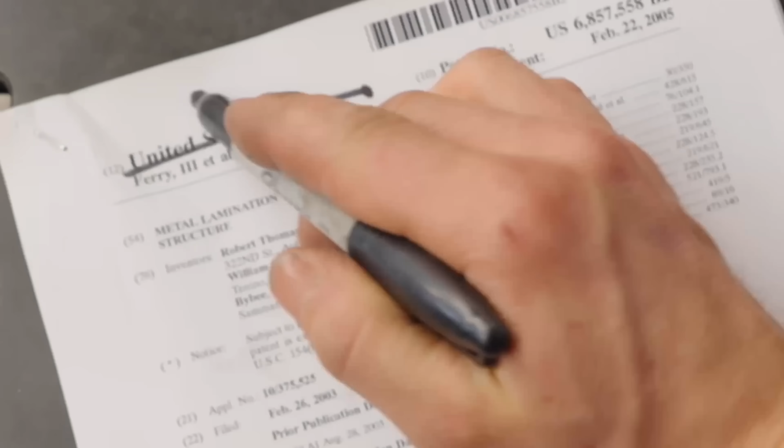2 years ago, upon discovering that the patent for making titanium Damascus had expired, I decided that it was time to figure out how to do it. And we were successful at making beautiful patterns out of titanium that reveal colors that are so unique and only possible with this incredible material. Just look at it. Isn't it wild?

Titanium is the metal of the space age. Its incredible strength to weight ratio means that it is the material of choice when performance is required and cost is no obstacle. From the SR-71 Blackbird to pistons in racing engines, I drop forged that out of titanium, to hip replacements thanks to its low reactivity in the body.

Titanium is an incredibly special metal that is very challenging to work, but it's even more challenging to get it to bond to steel. And so over the course of several months in 2024 and 2025, after doing reams of research, speaking to experts, and with experiments here in the workshop, we successfully diffusion bonded, otherwise known as forge welded, titanium to steel, and I was able to create a direct bonded titanium and steel chef's knife, as well as a nickel interlayer diffusion bonded titanium Damascus to Damascus steel axe.

And the dream throughout all of this experimentation and research was to start what we are starting today, a titanium Damascus katana. The history of the katana as a weapon, a tool, a piece of art dates back to the 4th and 6th century in Japan, and for over 1,000 years the katana was at the forefront of metallurgical innovation across the world. What those blacksmiths discovered and understood about steel making and metallurgy is truly remarkable, and with the greatest respect, I want to produce a piece of art that is a fusion of this historic symbol with modern materials. And in order to pull this off, we're going to need to do reams and reams of experimentation, research, and trial and error, and that is going to begin right now.

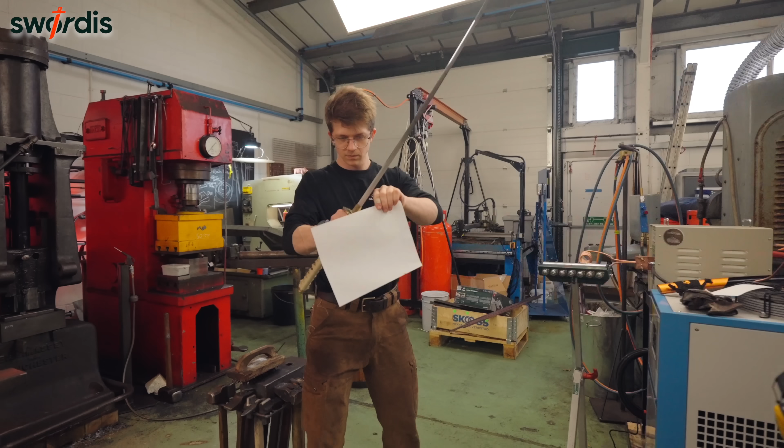And when you look at the profile and shape of that, and you imagine that I need to make this out of titanium Damascus and steel Damascus, it is daunting, because it is long, thin, it needs to be perfectly straight, and it needs to have all of the mechanical and physical properties that we require.

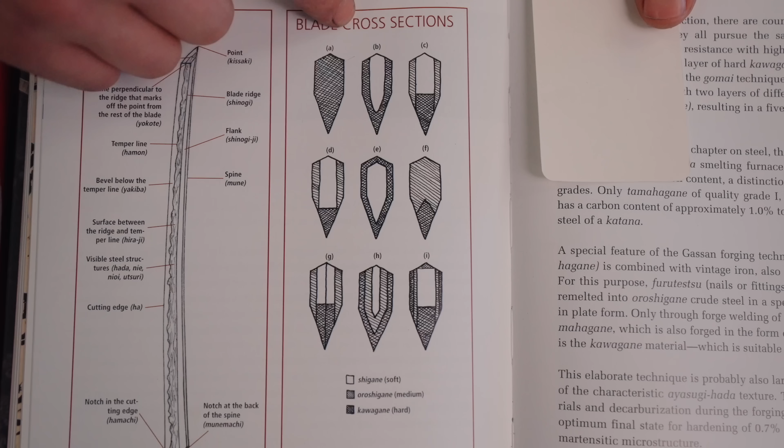Along with thousands of pages of these books that we need to go through to make this project as good as it deserves to be. And so with that, we need to come up with a bonding plan. Now, the laminated construction we're hoping to achieve absolutely has historical context to it, but which of these styles we actually use is going to depend on the results of our following experiments. Rudolf Dick's book on Japanese blacksmithing is fantastic, and I definitely recommend it. We need to go shear some titanium and steel.

Yeah, boy! This is our titanium. Get some steel for a jacket. Oopsie. I mean, this is a 2-man job to set this up.

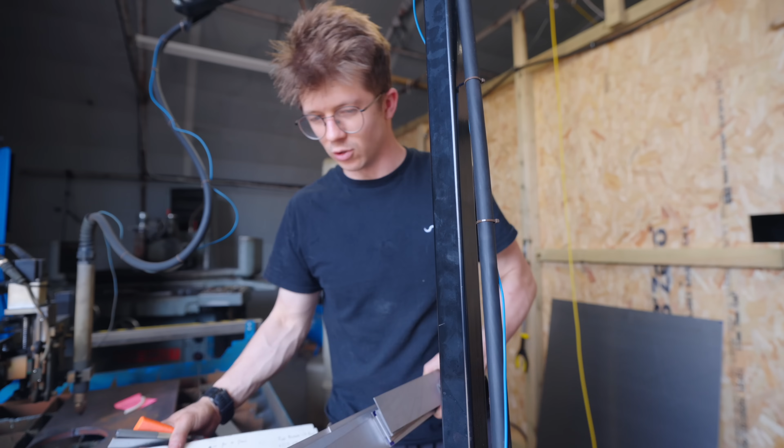All right, so for our first 2 experiments, here's my steel. Here is all of my grade 2 titanium. And here is my jacket material. Now you'll see, for 2 billets, I only have 4 pieces of jacket material because in order to reduce the amount of welding on the jacket by 2, I want to make it into a U shape, and so I made a die and a little top tool to do just that. I've given it all a test, and in theory, it should work just fine.

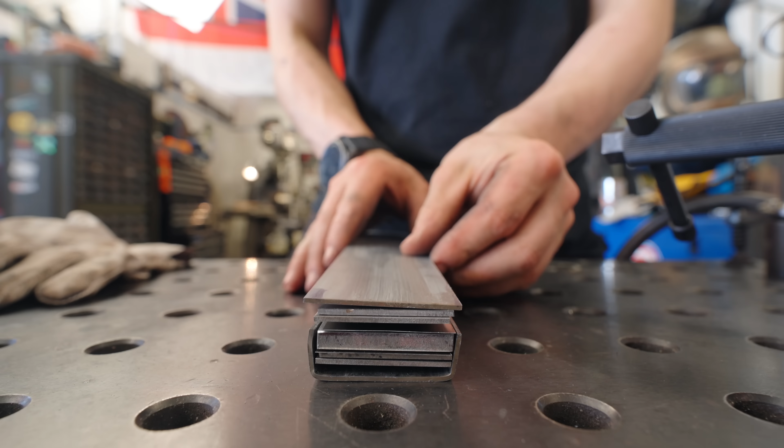That looks a bit crap. Golly, that's quick.

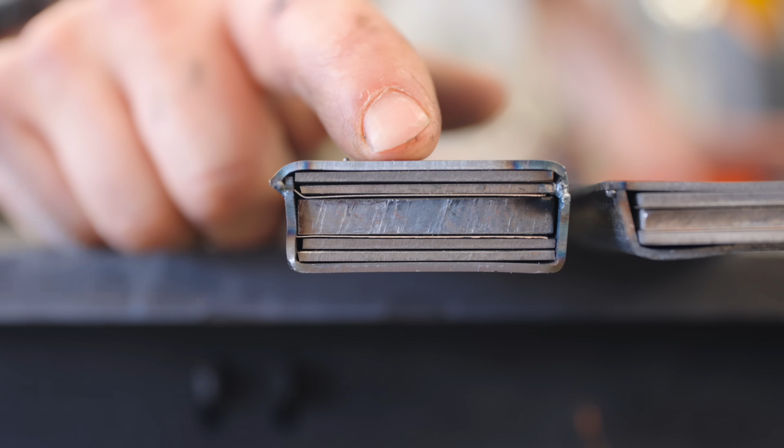There we go, you are now looking down the end of our first 2 experiments. As you will see, we've got on our long and thin billet, titanium, nickel interlayer, steel, nickel interlayer, titanium, and our short and fat has titanium, titanium, nickel interlayer, steel, nickel interlayer, titanium, titanium. Should be obvious now what we are trying to test.

We're trying to test if it's going to be better to bond these materials together in a thinner but longer profile where there is less drawing out and forging to do, or whether it's better for us to bond them together in a short and fat profile.

I've used a thicker steel in our short and fat piece so that when we draw both of these out to about 900 millimeters, 6 millimeters thick, our short and fat piece is half the length and twice thickness, and of course with a thicker bit of steel inside it so that hopefully the core of steel on both of them, when they are drawn out to 900 millimeters, is consistent between one and the other, and we can see if we learn anything. It's going to be very important for me to decide if I'm going to do the bonds for our katana close to final dimension or a long way away with lots of forging to go.

Both of our samples have a 0.2 millimeter thick nickel interlayer to act as a diffusion barrier between the titanium and the steel. We're going to weld a little end cap here with a hole so that the argon can flush through. We're going to weld some pipes on this side so we can hook it up to my argon hose, and hopefully we're going to be learning a thing or two pretty quick.

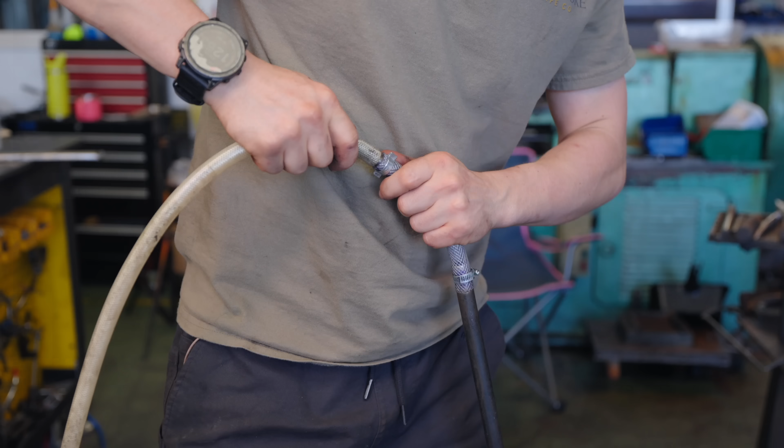There's our argon. Plug that in here. And what we're doing, we are pumping argon through this billet so that we're hopefully going to evacuate all of the oxygen. I can then turn the pressure down and just have a little trickle, so we've got a positive pressure in here. Any oxygen in here at a high temperature is going to be a bad time because titanium oxidizes very strongly at temperature. Oh, hello. We're definitely getting argon flow. We've now turned down the flow.

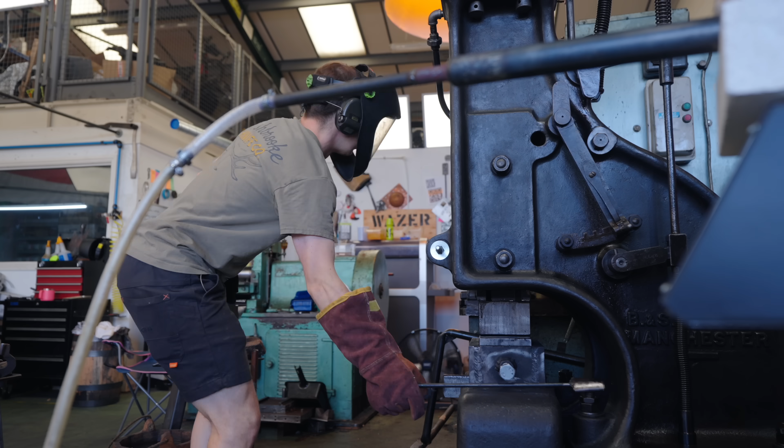Okie dokie, 900 degrees Celsius. 1, 2, 3, 4. Ow! Yeah, baby. Yeah, mama. Let that sit in there for a minute. Then we can pull it out to air cool and start on the next one. Unfortunately, there's no real way to know if oxygen's in it or not. We just hope and pray. In we go. Up to temperature. Here we go.

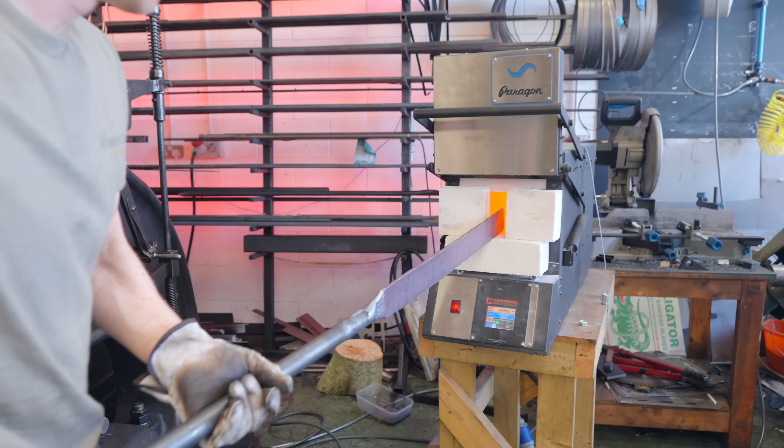Once these have cooled, we're going to peel off the mild steel jacket, which shouldn't be bonded to the titanium. We'll see if we got welds before we then draw it out to final size. Oh yeah. Oh. Woo. One down.

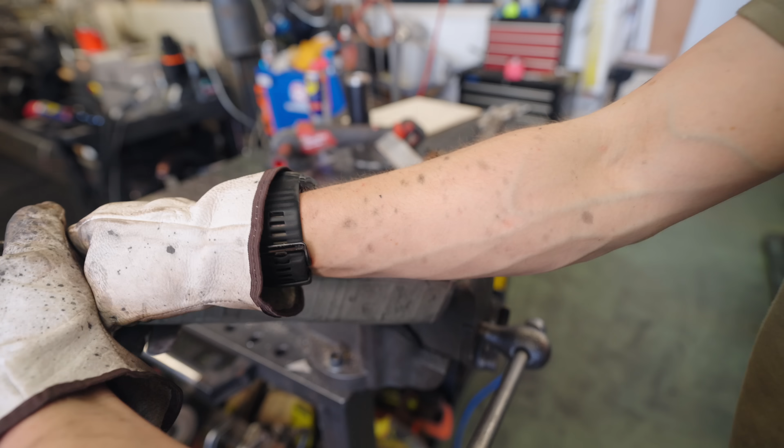Now remember, the reason this mild steel jacket is coming off of that titanium so easily is exactly why it is so hard to forge weld titanium to steel. See, what's happened here is when we heated up our titanium and we heated up our steel and we smashed them together, the iron atoms and the titanium atoms, they reacted to form what's called an intermetallic compound. So instead of just bonding together, with that temperature, they were able to react and form something completely new.

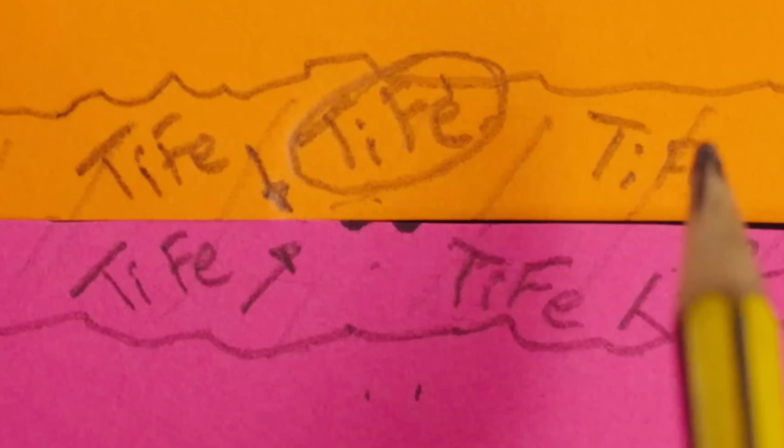And it's this light gray that you can see on this steel here, and that intermetallic compound of titanium and iron is super, super brittle. It isn't strong enough to be able to hold a katana together, as you can see, because we're ripping it apart right now. That is exactly why we put a layer of nickel in there.

That is what's called an interlayer, and as I mentioned earlier, it's a diffusion barrier, so it stops those iron atoms ever reaching the titanium atoms. Nickel likes to bond quite well with titanium, nickel also likes to bond quite well with steel, but it keeps them both nicely separated.

Now, I have been able to successfully weld titanium to steel without the use of an interlayer, and I made a chef's knife with that technique, but that involved keeping the material at temperature for as little time as possible. So heating it up, smashing it together to bond it, and then immediately quenching it. And that is an idea that I was given by Professor Amir Shirzadi, who is an expert in the field of diffusion bonding and has spent his whole career working on the topic.

And so the reason that I chose to not go for a direct bond but go for the nickel interlayer is so that we have the ability to do what we're about to do, which is heat them back up and forge them out to final dimension.

Oh, look at that! I picked up a boo-boo. Boo-boo. A boo-boo. I think I've just given my wife the ick. Check this out, though. What? Damascus steel band-aid. Look at that. I am now part Damascus.

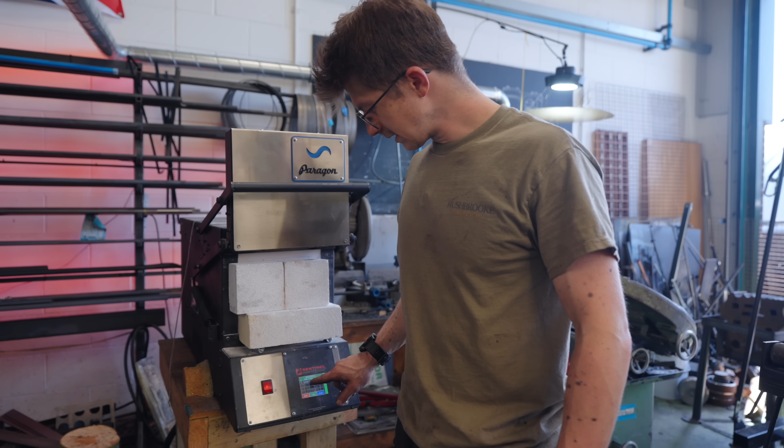Now, the thing is, now that these pieces are all bonded together, no more oxygen can get inside there, which means we can crank the temperature, go a little bit hotter, forge them out without the jacket or the argon shielding. So we can now go up to 1,050 degrees Celsius. Okay, start on the thick one.

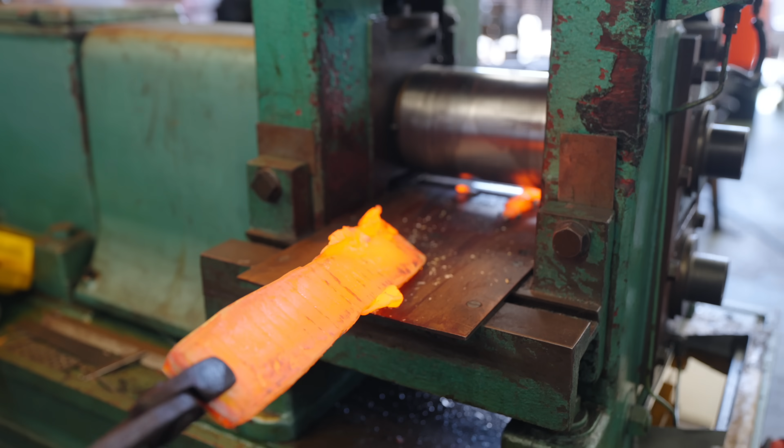Oh, yeah. Oh, no! Oh, no! That's not good. Oh, boy. Oh, it's awful. Look at all the stuff that we just squished out.

That, unfortunately, my friends, is that intermetallic compound, which the only reason I can think for how that's happened is that the edge of the steel has kind of folded out past the interlayer, just on the edge, and touched the titanium, reacted with it, forming that intermetallic compound, and then, guess what? That intermetallic compound has a lower melting temperature than either steel or titanium.

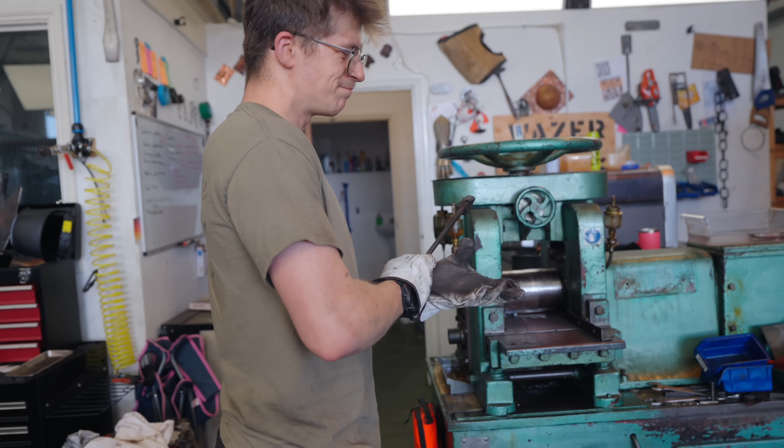So that sucks. Let's not talk about the amount of time that it took to get that sample to this point for the experiment. What day of the week is it? Oh gosh. It's the end of the day on Thursday, and we started this on Monday. Now, admittedly, our efficiency has been a little bit reduced by the increased temperatures. That is such a shame. Nice experiment, Alec. You melted your sample.

Well, I'm going to do the next one at a slightly lower temperature. I'm going to do it at 1,000 degrees Celsius, so hopefully we don't get anything squidging out. We'll continue rolling out the other one, because, I mean, what else are we going to do? We'll still get them to an even size, but it's going to be interesting to see what happens. Let's see how much we lost. We've lost about 90 grams, which is not insignificant.

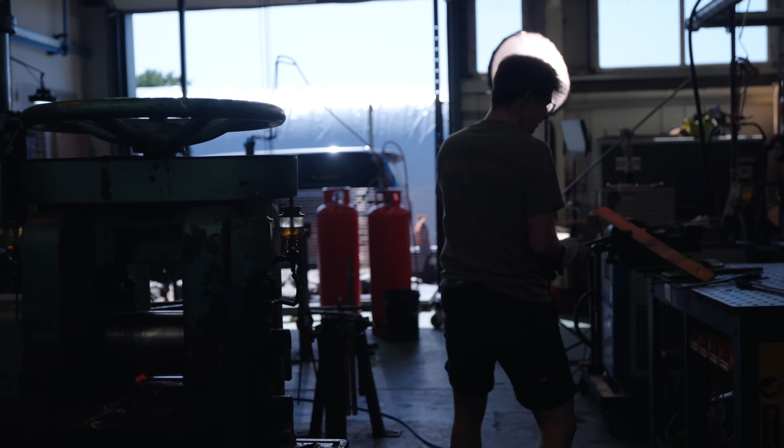Here we go. 3, 2, 1. Oh, no! Oh! Oh, hello. That's a disaster. It did it again, even with a lower temperature. This is a real problem.

I wonder if it maybe has something to do with the rolling. I mean, why would it respond differently to rolling as compared to hammering? I mean, I've done this before. This is not the first time we've forged titanium that's welded to steel. Why is it being weird? I just don't know what's going on, guys.

Okay, we'll do this one. That one's better. You know, apart from the whole, like, banana-ing, that one went a lot better. That's a much lower temperature. Okay, 950 Celsius. Much better. Another one at 950.

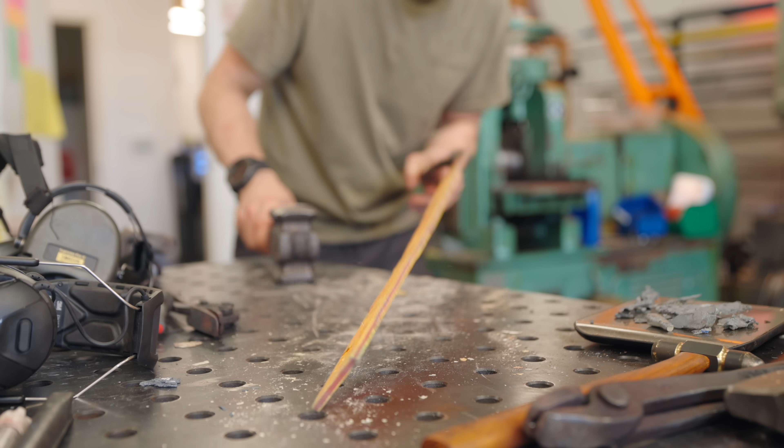God, even just getting this stuff straight while it's hot is next to impossible. Goodness gracious me. It's not looking good. Let you slow cool there.

950 degrees Celsius seemed to be an appropriate temperature where I could still do a little bit of rolling and reduce the thickness, but we didn't get that sludge.

Now then, subsequently trying to straighten these things after the rolling was a good bit of a challenge. I'm gonna leave them in the kiln to cool down overnight and have a look tomorrow. I am wondering a number of things. And I'm quite scared because I've set out on the project of making this titanium Damascus katana. The prospect of actually being able to pull it off is starting to be quite concerning, and here I am.

I thought it would be challenging, but I kind of thought like I'd be learning things along the way with moderate amounts of success, and then kind of refining our way to success. But currently it seems like it's just failure. And failure is the least satisfying way of learning things.

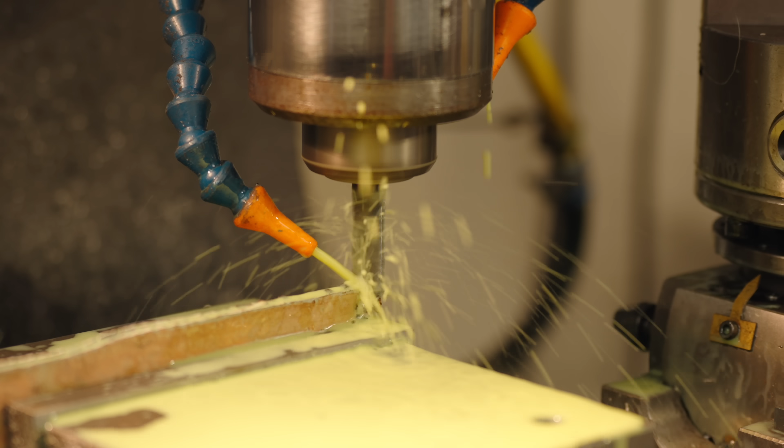Looks like there's a delamination there on the top piece. Oh, it's definitely come apart there. That's not good. We don't have to be metallurgists to know that that's not right. How wild is that top one? You can see the gaps where we squidged out that titanium iron intermetallic compound. Look at how much of the thing we've lost. That is no bueno. The bottom one is a little bit better, but there's still some of those little holes.

I mean, that is a colossal failure. The steel is fully detached from the titanium, or the interlayer even. That is bad, and this is the better one. Look at that disaster. Oh, goodness. Yeah, can't make a katana out of that, can we? Yummy. Great. No big surprises there.

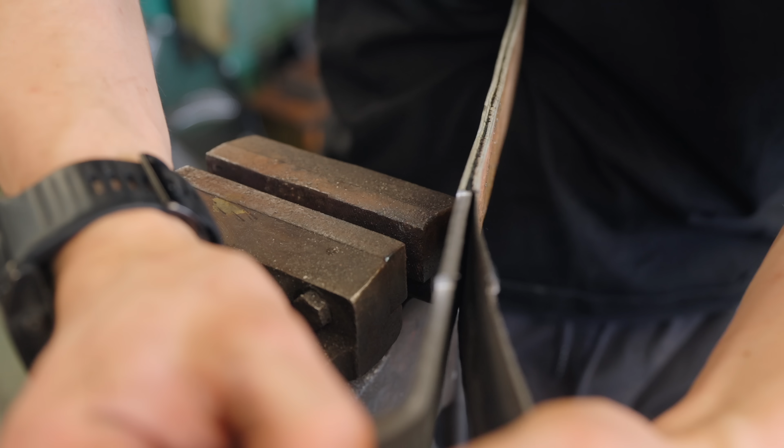Oh, hello. Ripped straight apart. Oh, gosh. That's not meant to happen. It's not looking good, guys. Those voids from the material squidging out made a stress concentration that broke the steel. And on this one, it fully delaminated. Interesting. That wasn't a very good few days in the workshop, was it? In the scrap with them.

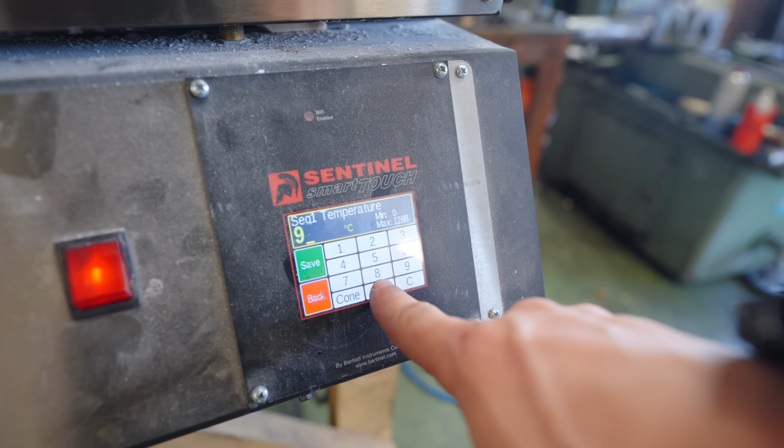All right. This is some sheet from some of the experiments in 2024. And here, some of the old test pieces. Also got some here. To match, we're looking for number 3. This old fella. Put you in there, guy in 2. So I've taken those 2 samples from a couple of years ago and put them in the kiln.

So one thing I recognized is that when I made that titanium Damascus axe, I actually only forged it during the welding heat. So I didn't do any further forging after the fact, and it was always in an argon canister for that single welding heat. So between it and these experiments, I actually changed 3 variables, not the 1 variable I was hoping to change, which was just the dimensions of the piece. So that's some pretty shoddy experiment design on my part, which I'm paying the price for.

But hopefully what we can find out now, with these successfully bonded pieces that also had a nickel interlayer from a couple of years ago, can I then heat them up without an argon jacket and then actually forge them without them coming apart? Was that the crux of this whole issue?

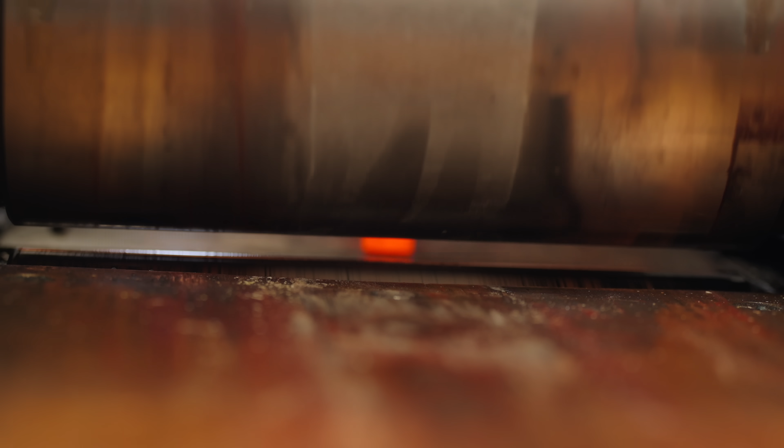Wow. I think I could have tightened the rolls a bit, eh? Whoa, hello. Yeah, that just ripped apart. Next one. Hey, that one stayed. There's the first one, it doesn't look very good at all. We're gonna try hand hammering the other one. Okay, back in the forge. Second heat.

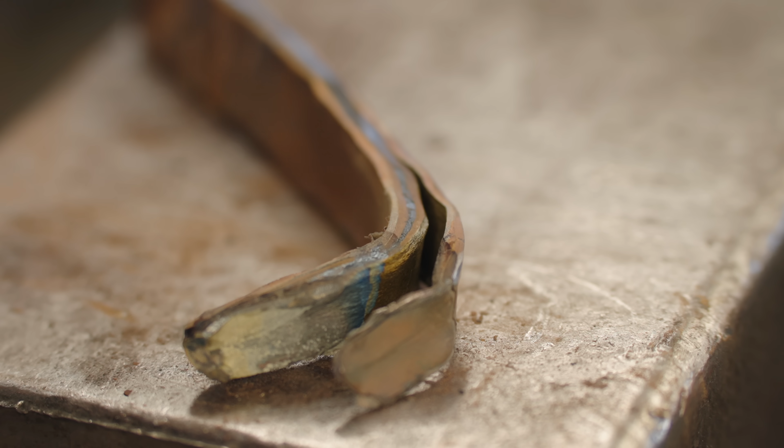Yeah. And by yeah, I mean nah. Definitely appears we can't forge that, as it appears that nickel has separated from the titanium, which is not ideal. So I think it's pretty clear now. Forging bonded titanium to steel, significantly changing the cross-section, is going to be a no-go for us. So as annoying as it was to throw a week's work in the scrap, I've definitely learned something, which at the end of the day is the goal of experimentation anyway.

And the answer to the question of whether we go long and thin or short and fat before we forge it out is neither, because we can't forge it out. All that we can hope to do is take our material, bond it at full length, and that's it. Finito. It would then be a case of heat treating the steel, cutting out the blade profile, but this of course needs experimentation. Will it actually work?

Because this now means that everything starts much longer. We'll have to weld way more material in one heat, and my oven is about a foot too short. And so for our next experiment, we're going to use the longest billet that we can fit in the kiln and test the material after one single heat of bonding.

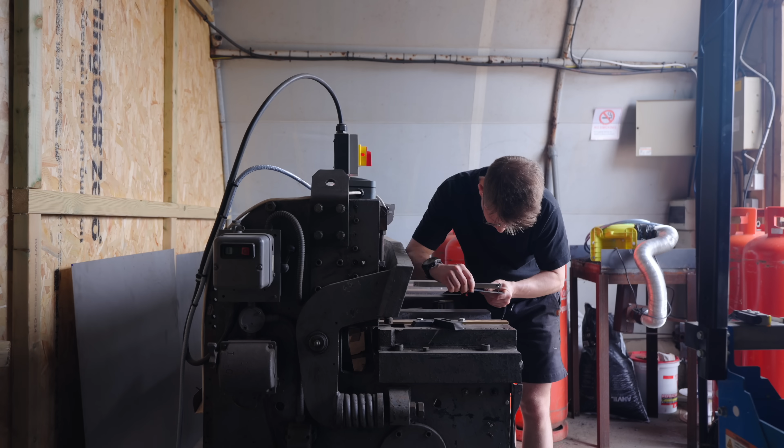All right, in a little bit more on your corner, like a smidge when I say in. Well, I guess you can also use your eyes and line it up, eh? Fingers clear, cutting.

What? What? Take that pen out of your mouth. Please, can you turn on the fire? Turn on the hammer. You know exactly what I am saying! Okay. Did you say you? No, stop! Oh. What the...

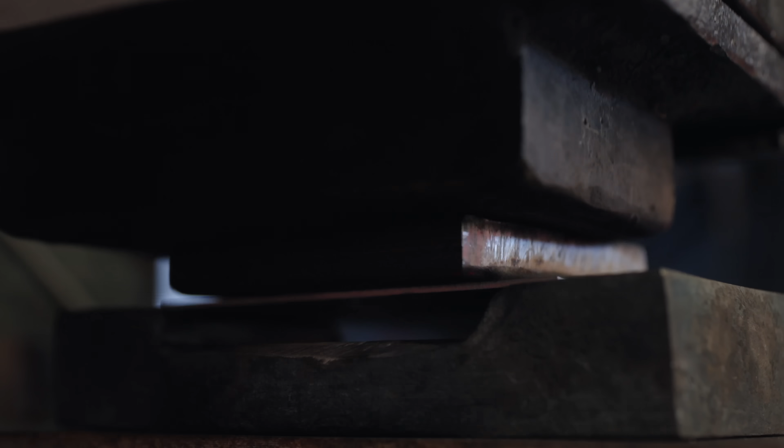Bellissimo. Oh, I love that for me. It doesn't fit. See, what I would have done is made that swage die the same thickness as these, and then it would fit.

Oh my goodness. They fit like a slightly tight glove. In fairness, I like my gloves to be tight. I don't like loose gloves. Who wants a loose glove?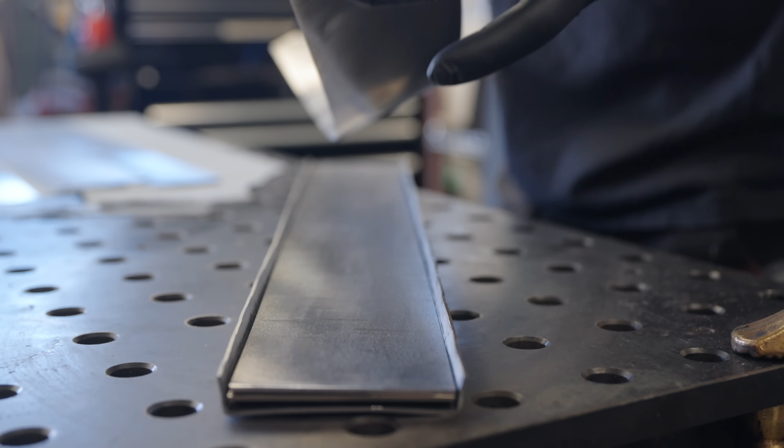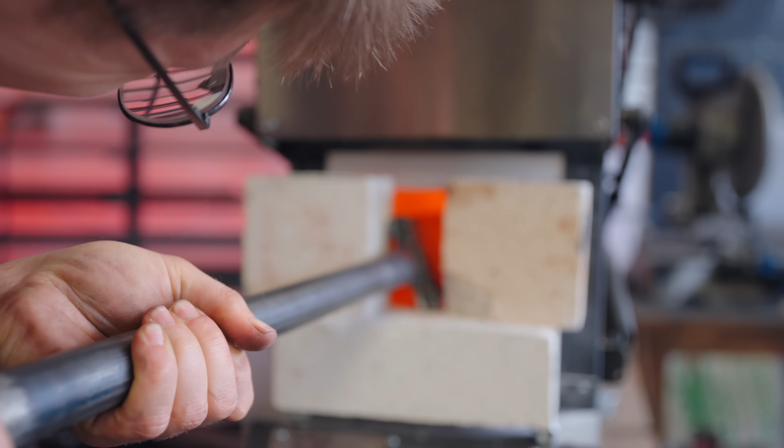Where'd that bit of steel go? Somebody keeps moving it. How is it longer? Where did my measurements come from? Your brain. I'm very confused. Yeah, that would do it. I changed my measurements halfway, and then I didn't remember them. Okie dokie. In we go. All right. Here we go.

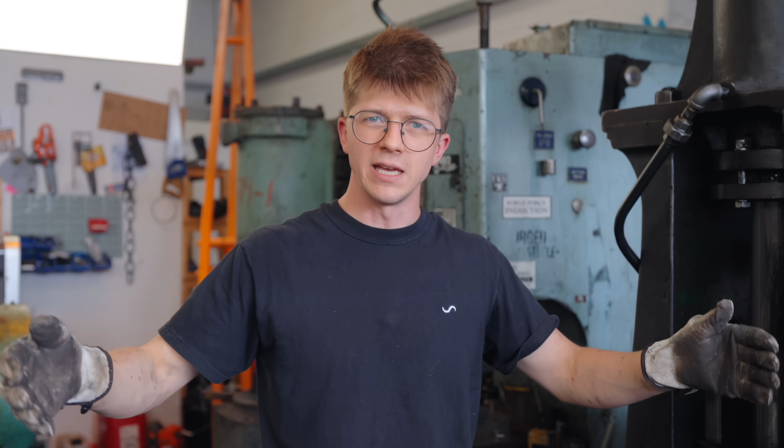All right. That is hard when it's that long, and it is also very wide. This is part of the big concern about this: it's so long, it needs to be at temperature. I went for a slightly lower temperature of 850 Celsius, which is the same temperature that we know worked well on my titanium Damascus axe, but it's very long. It's also 3 inches wide, which is as wide as our final billet would need to be if we were to make a katana with this technique and cut it out.

Trouble is, the longer it is, the more distance I've got to cover with my hammer strokes. The wider it is, the less the actual pressure on the bonding interface, because obviously, pressure is a function of the cross-section that we are hitting on. This is significantly wider. It's significantly longer. And we've only got 1 heat to pull off these bonds. And by goodness, it cools down quick. A bit nervous about this project, Jamie. A bit committed now.

For all you know, there's a success in that kiln. You just got to wait for it to cool down and find out. Yeah. But I will still need to make it about 30% longer on the final thing. So it's still not like an exact replica of our final processes. And I feel like I was pushing the limits of what I can bond in 1 heat there, if it bonded. So are you saying in this instance, longer isn't actually better? I'm saying longer is a lot harder to deal with. Well, yeah, that's what you said.

We have a leak. It has grown legs, one, because it is now no longer square to the Massey. And it's also inconstant. Is that the word? Incontinent? Yeah, I think incontinent. Anyway, oozing all over the floor. Inconsonant would be like a grammatical thing. Incontinent would be a bladder holding thing. Right, okay, well that's what I meant, yeah.

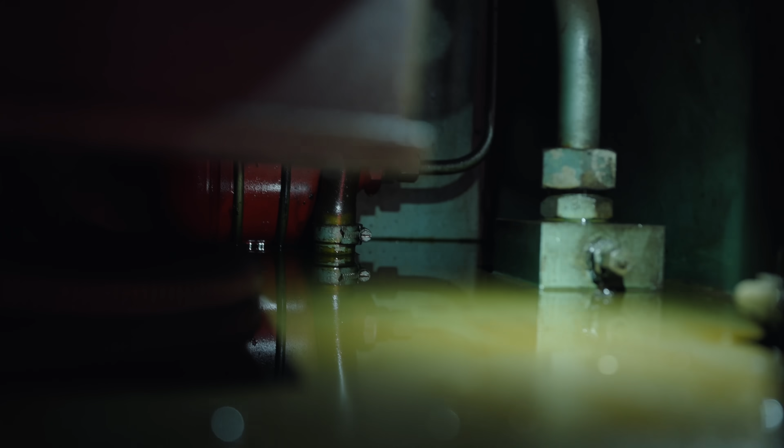And if you look in here, you can see it's like a swimming pool of oil. And I forgot to bring my bathing suit this morning. Your bikini? There's also oil on top of this, Jamie. And if there's oil on top of that, it could be leaking around this fitting. It's not moving. Nothing's moving. I think this is like a radiator, and it appears to be filled with oil. That's not good. Maybe I overfilled the thing. Oh, look at that. It's perfect. It's not bad. Yeah, well there's nothing in it because it's all on the ground.

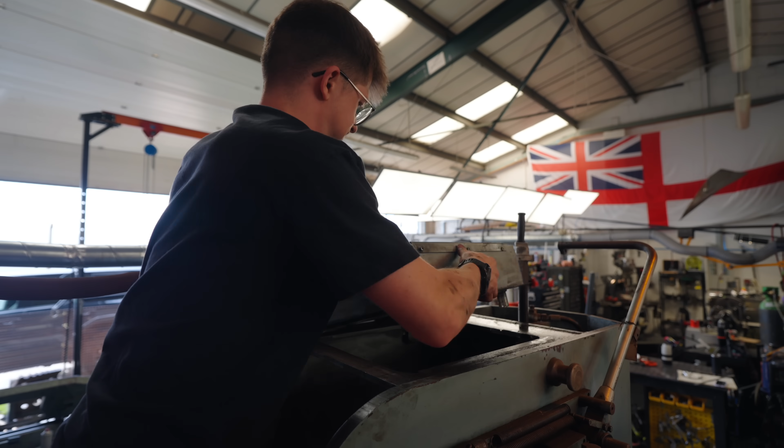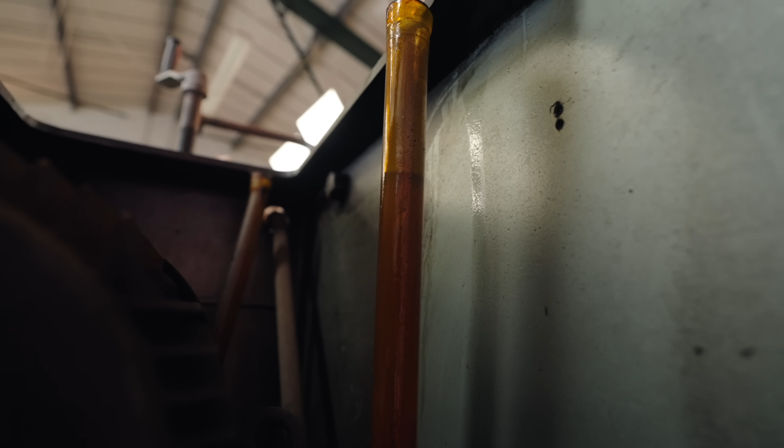At last I can see inside my press. These pipes to recirculate the oil are completely full, which is probably not ideal because I presume it's a low pressure recirculation of oil. I wouldn't assume they should both be full. Oh, that's not solid. Oh, you know what we could do? We could drain out some of the oil of the tank and see if it drops the level here. God, delightful. Oh, yummy. Look how clear looking that oil is. The level is dropping. Great news. I stood up too quickly and I think I'm gonna pass out.

Ooh, yes. It's like a wave machine at your local swimming pool. Oh, there goes my t-shirt.

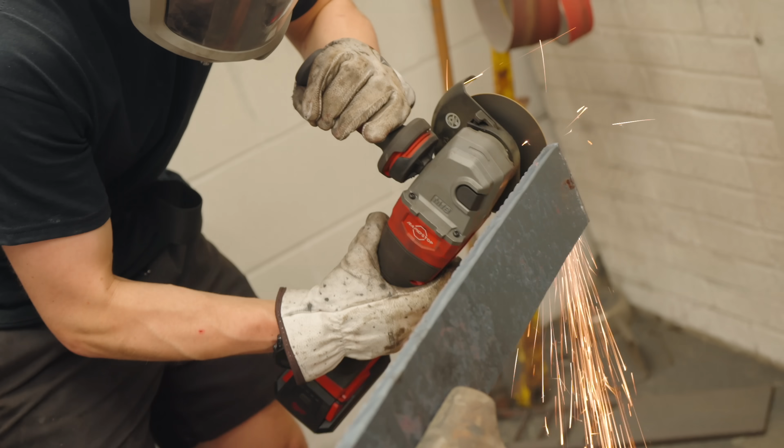Oh, yeah. Yeah, it's quite promising. Have you just jinxed it? The blame's going on you, Popple. Oh.

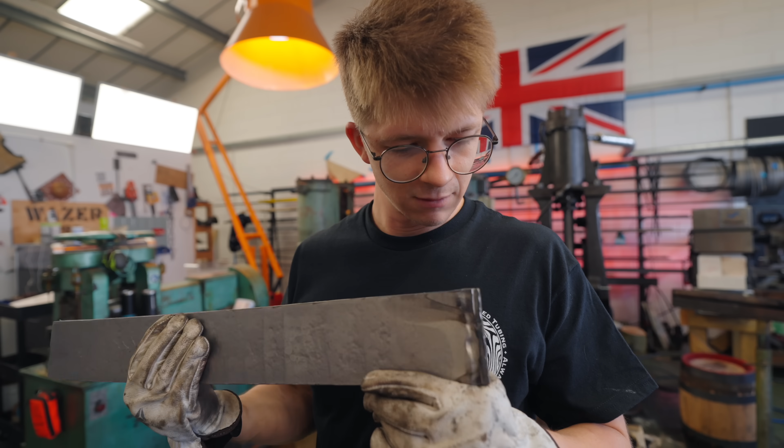Does it sound like it's cracked? It rings like it's one piece. I think it's bloody worked. Might have blooming worked, eh? It might have worked. Let's see how much strain we applied during the bonding. How do you think we might figure that out, Jamie? It's how much you moved the material compared to what it was in the first place.

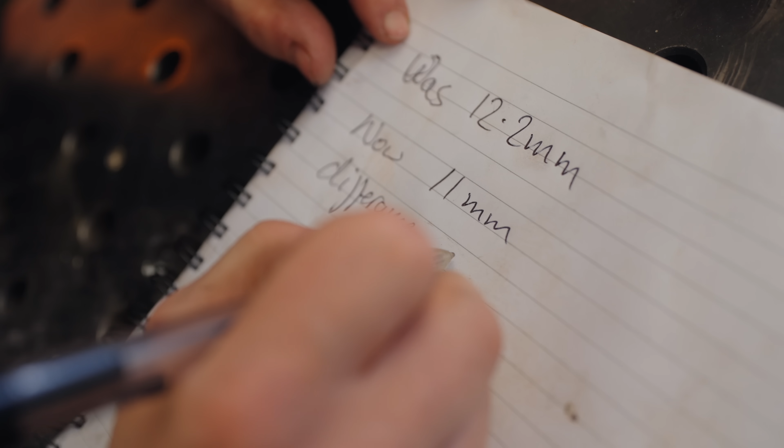Yes, exactly. It was 12.2 millimeters. It is now 11.1, now 11 millimeters. Difference is 1.2 millimeters. Strain is 1.2 divided by original length, which means we applied 0.098 strain. We basically squished it 10%. Is that enough to get these bonds to stick?

In industry, when diffusion bonding is done, they're often aiming for very, very little strain because it changes the cross-section of the part. But they're also doing the bonding over a significantly longer amount of time. So they might be holding a part like this under pressure at temperature for like 2 hours. Here, I've got like a few slaps on the hammer and that's all we've got. So we've got to use a lot more force, and also more force means more strain, more squish.

Right, you know what this is, Jamie? This is all distracting us from what we actually have to do, which is, what do we actually have to do? I don't bloody know. Well, I guess we've got to test it and see if it's proper. So, I think I'm gonna mill the edges so that we've got some nice clean sides, and then we'll section off some components that we can test individually, and then we will harden a good chunk of this.

What the was that? What the hell? I just snapped my first 12mm end mill. That's the biggest end mill I've snapped in my life. We totaled that thing.

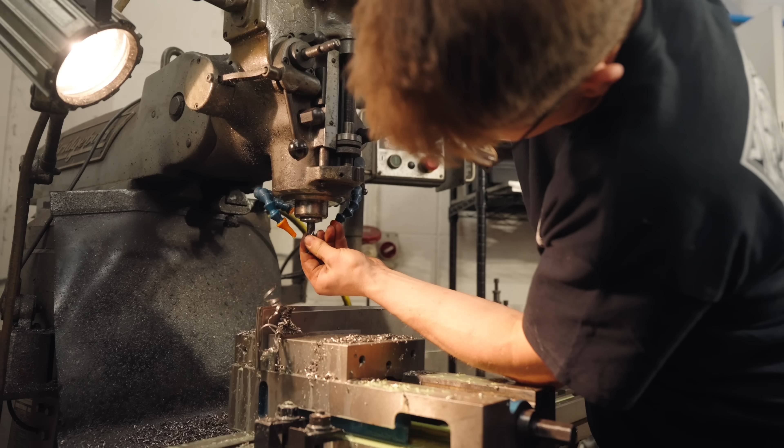Do we see any delaminations? Both sides, under simple visual inspection, nothing, which is exactly what I want. It looks good to the naked eye. How about to the Temu microscope? You've got a very expensive microscope in the office, you know.

Why does it not turn on? It really needs to charge while it's plugged in. Here we go. How about this one? Needs to charge too. I really want a metallurgical microscope. I'm always looking on eBay, but I also don't want to spend £1,000 on one. I'm trying to find a deal on one that's like been dropped a couple of times, you know what I mean?

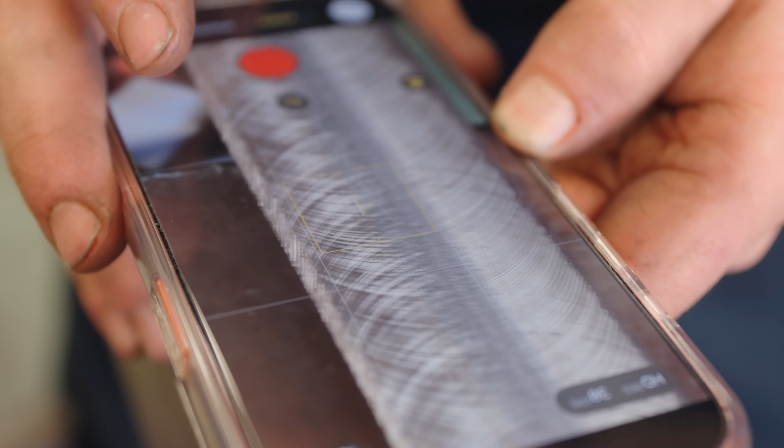Right, now we've got it under the microscope, powered by apples. Interesting, there does appear to be a little line between the nickel and the titanium that I don't like the look of. There's less of a line between the nickel and the steel, and there's no line on the right-hand side. Yeah, I don't like the look of that line, do I?

You tried smelling it? Smells half stuck to me. Does it smell solid, or does it smell like number one?

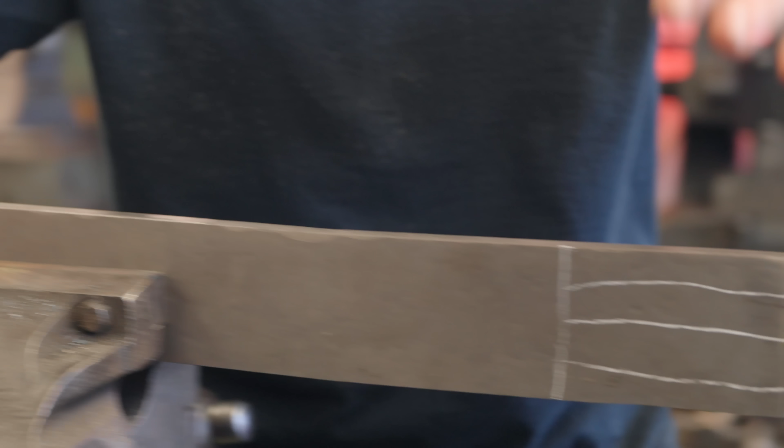You're nuts, you are, man. How's that nuts? That's Rocky Mountain oysters trying to cut through that. Did you look it up? I had some last night.

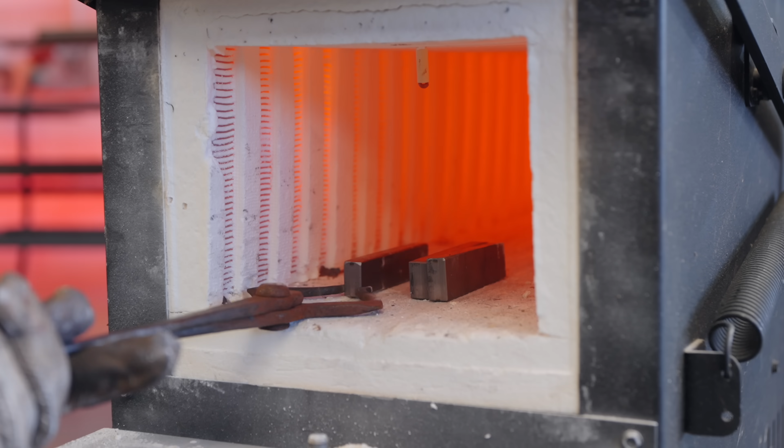Yeah, baby! These are our 3 samples to do some tests with. Gone ahead and hardness tested one of these. Comes out at 26 Rockwell in its unhardened, air-cooled state. With those 3 samples, the plan is going to be as follows. With 1, we are going to oil quench it. We want to see if it will get hard enough, or we want to see if it splits apart and delaminates. 2, I'm going to take one out and just simply air-cool it, see how much hardness we get from an air-cool, now that it's a slightly smaller cross-section.

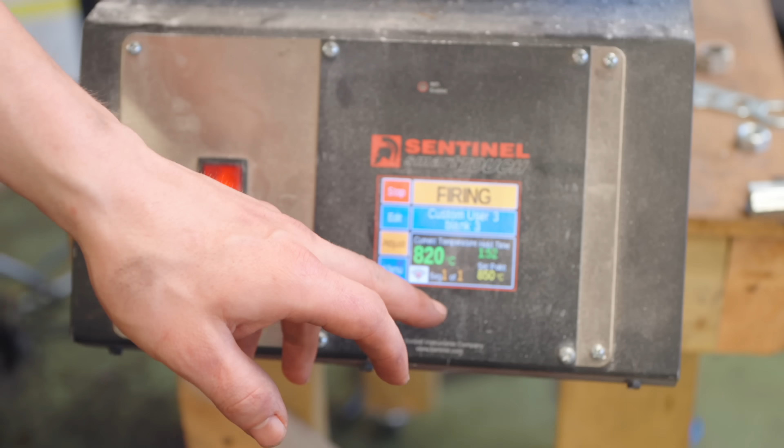3rd sample, I'm going to take to the rolling mill. Remember, it was 12.2 millimeters. We bonded it. It then became 11 millimeters. My plan is to apply approximately 0.1 strain with each heat and see if maybe at a lower temperature of about 850 Celsius, and with pretty low strain per pass, is it forgeable now.

First one's air cooling. There we go. Let that air cool there. Oh, so pretty. Wow. Look at those strange squiggles. Next one's quench.

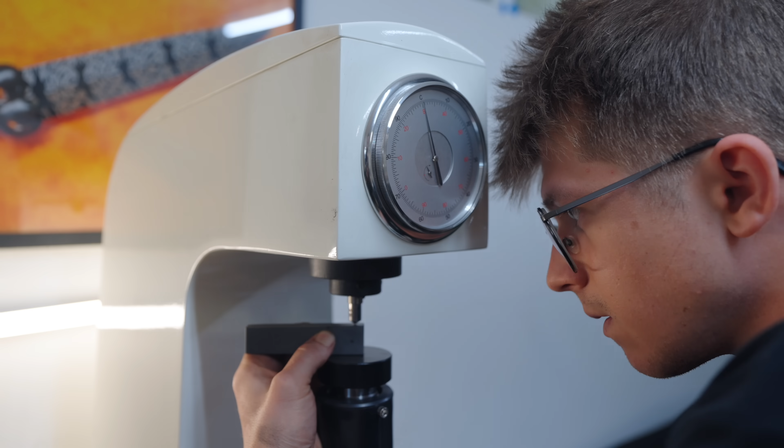This is our quenched sample. It appears to still be in one piece. Can't see any cracks yet. Definitely hard, because it does not grind very easily. It looks good. Ooh! 62 Rockwell. 65. 63. Very adequate hardness there after the quench.

We are obviously using a knife steel, 1080, as the core here, but part of the reason why I'm curious about the hardness is it's got all this titanium on the outside of it. Titanium conducts heat a lot slower than steel. The worry is that as we quenched this, the heat transfer through the titanium wasn't fast enough to actually cool the steel enough to form martensite, which is the hard microstructure of steel. It appears that it was fast enough. So in this cross-section it works. We'll see how much that changes when we get to that one. We're going to put it in the oven to temper it.

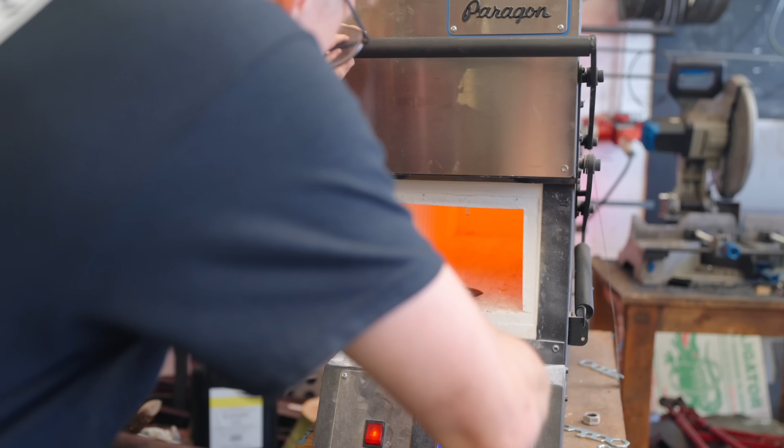And now let's roll this one. Go another millimeter down. Look what I just found. It took me having this thing for 9 months to realize there's a measurement scale on it.

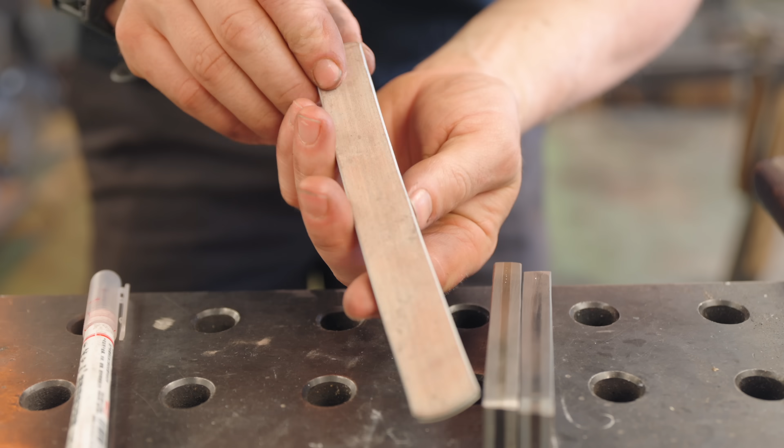It looks like it's still in one piece. Oh! Looking good. Okay, go back up to temperature, then we're gonna let it air cool. Oil hardened after tempering: 57, 58. Air cooled sample: 32 Rockwell, definitely softer. Our rolled sample is looking quite promising. However, on this end, we did get a little bit of delamination. You'll see we stretched it almost twice its original length. Let's clean up these edges, then maybe slice it in half.

Well, you say you made it twice the original length, and that's because you did 0.5 strain. Exactly. Look at you. Well, very good, Jamie. 5 passes, 0.1 strain. Oh, very good. I don't know if I do want to cut it in two, because I can make a sweet little knife out of that fellow if it works, but obviously we're here for experimentation, we're not here for making things.

Yeah, but I thought you liked cutting things in two. Is that a reference to this? Finest forged tubing, always supplied in 2 halves.

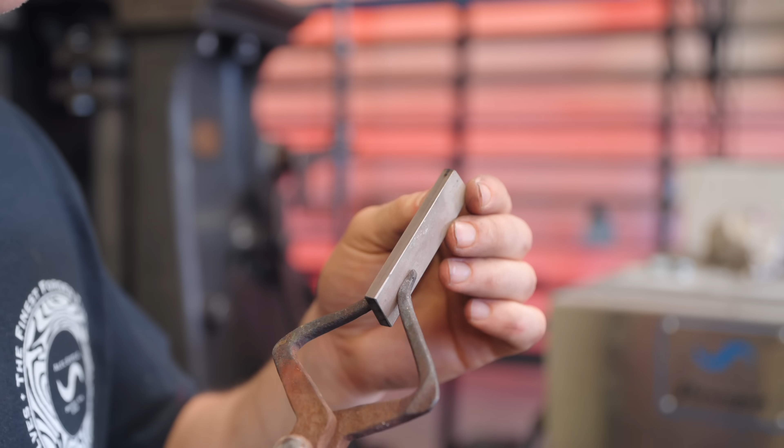It's hot. Now I'm gonna harden and temper this half, see if anything has changed after the roll and... Exactly. There's actually 2 more rollings. Roll and... There we go.

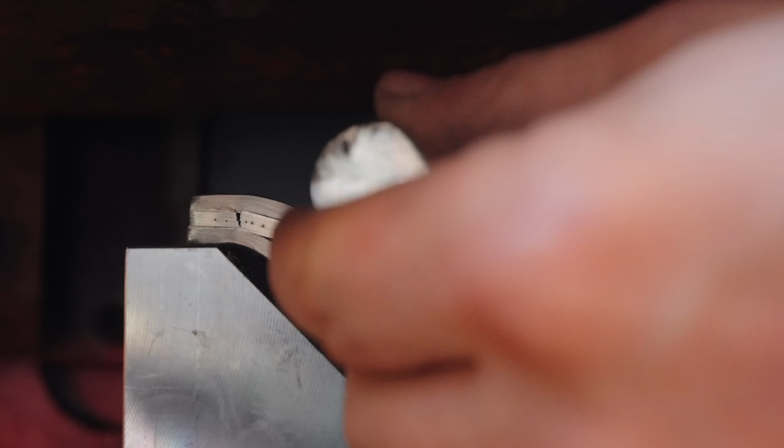Air-cooled sample, bending test. Let's go! No way! Did you see that? I'll go again. Look at that! That's awesome! Now our hardened sample. This is gonna be a bit more violent, I suspect. 3, 2, 1. Oh yeah! Wow! Whoa. I don't know what I was hoping for here.

Our unhardened piece largely stayed together, which is remarkable. It appears like there's a tiny bit of delamination here on the unhardened piece, but the rest, it all stayed together through these incredible bends. This is hard on the material. Look at that plastic deformation through there as it's taken the bend and it has stretched the titanium on the tension side. It has upset the titanium on the compressive side, and the joint through there withstood it. That's a remarkably good titanium to steel bond.

However, of course, on the hardened piece, it is not surprising that the steel broke. The steel is now in a much more brittle state, so I expect the steel to break when we're trying to force it around a bend that's that tight at 58 Rockwell. And obviously it appears like we also delaminated the steel from the titanium. I might have liked the steel to stay stuck to the titanium a little bit more and maybe force the titanium to break where the steel broke.

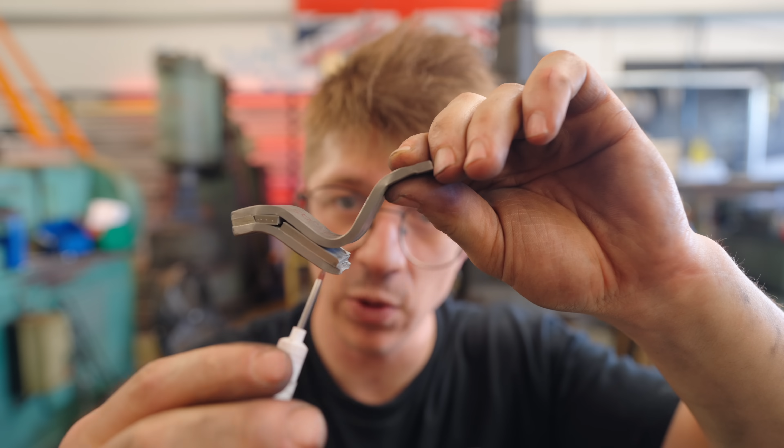So instead of the steel breaking and then it peeling as the titanium then takes the bend, I almost would have preferred the steel broke, but the bonds between the steel and the titanium, just either side of where the steel break, would have been so tight that it would have made a stress concentration to the titanium and broken the titanium there. Obviously, our bond between the steel and titanium is not as strong as the steel itself. I think that's what you can deduce from it.

Anyway, it's now time to harden that forged piece. So, into the oil you go, and we'll test this one too. This is obviously also going to break, so I'm just going to do a quick temper and get it up to a deep blue or something. Some pretty colors. Here we go!

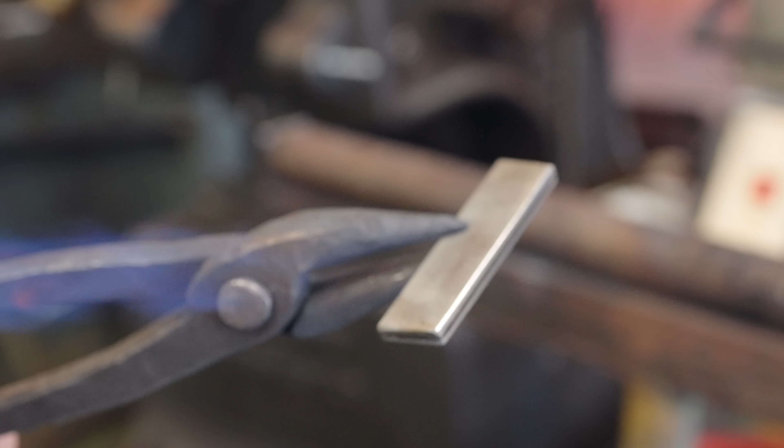Wow, that was impressive! That was very impressive. Now obviously I tempered it hotter than the previous one. That hotter temper is going to mean that it is now tougher. Oh, do you hear that? Yeah. It just popped in my hand. But with it being tougher, it also then gets less hard. That was 49 Rockwell, so a good bit softer than the previous one and not quite hard enough for a knife. Very interesting. These are, of course, very different cross-sections, this one being thinner than that.

It means that the bend radius relative to its thickness is smaller or bigger? I don't know. But there's a difference. It takes less stress to bend a small thing than a big thing. What's very exciting about this test is we have shown that the titanium to steel bond can be very, very good, especially in its unhardened state. The fact that that didn't separate is remarkable.

We have shown that it's likely not going to perform as well as just a bit of steel. We kind of know that, right? That's why katanas are made of steel and they're not made of titanium with steel. The characteristics of steel suit a sword really, really well. But what I'm thrilled that we've learned is that it is possible to forge it.

And when I had the disasters earlier on in this video, I thought the answer was there is no chance of forging it. But at 850 degrees Celsius and 0.1 strain on each pass, we were able to forge it down and stretch it out and not have a significant loss of strength, because we can't even measure the loss of strength. I mean, it looks great.

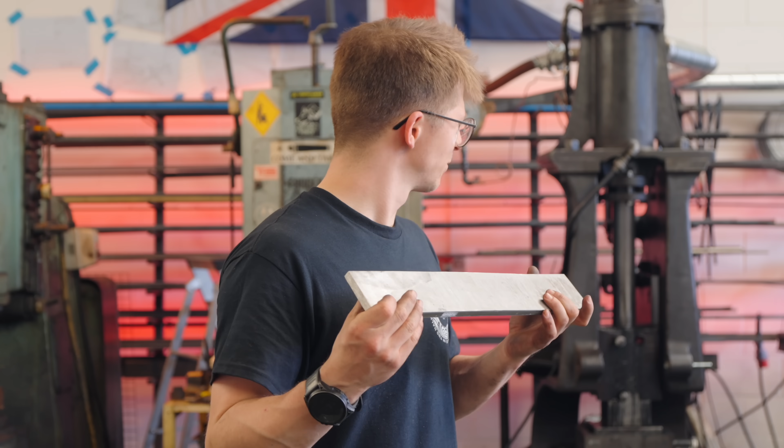So that means I now have 2 roads ahead of me. I can either heat this up and then roll it down into some thinner bar, or heat this up and then just go straight to a quench. And I don't know what on earth I'm gonna blooming do. Fortunately, I'm definitely gonna need a longer way of heating this stuff. Hang on a second, I'm lost now. This might need a chalkboard here. Might need a flowchart here, Jamie.

Hang on, when you said titanium Damascus katana, did you just mean the slabs of titanium and steel? No. This is a test before we spend days and days and days making beautiful titanium and beautiful steel Damascus. So they will both be patterns? They will both have patterns, yes.

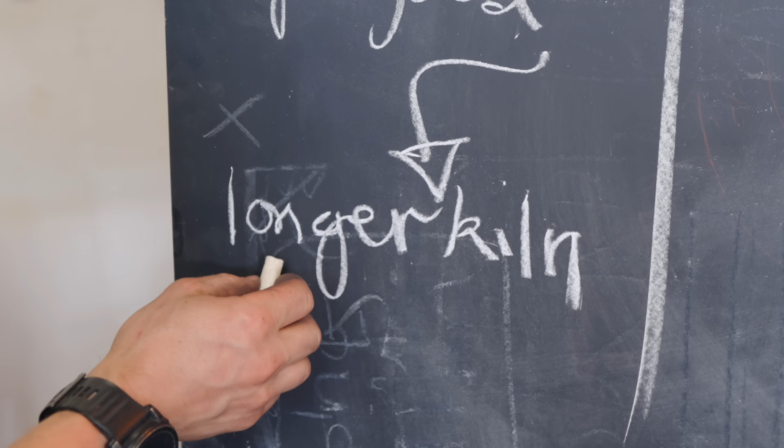If I quench this experiment, what we're demonstrating is that we can bond a big slab that needs to be as long as the finished katana, and we will then heat treat it in its big slab state before we cut out the katana. So with this piece, I would then quench it, and then grind down the sides so that we get it to the final thickness, test it, and if it's good, I'm gonna need a longer kiln to be able to heat up, bond, and heat treat our final katana dimensioned piece.

Now, if we want to forge this piece, we can heat and forge. It's currently 49 centimeters. We'll be able to increase its length about that much. That also means we need a longer kiln. Bugger. Okay, I've got the definitive answer. Where did I put it? Where did it go? What have I done? Oh, for goodness sake. Here is the plan.

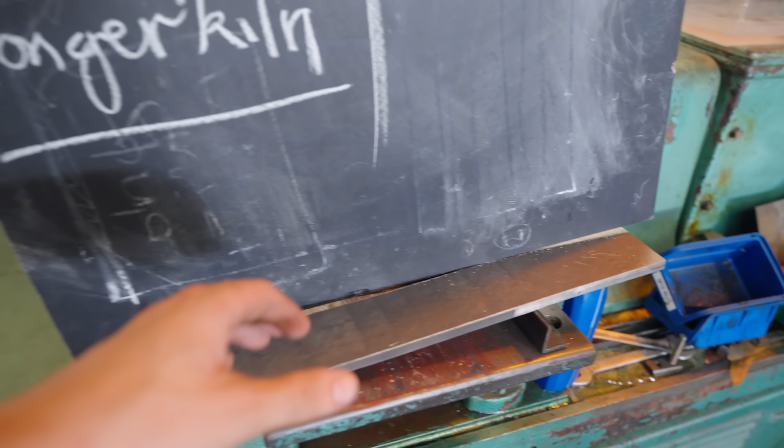We are going to harden and temper this big slab here, mill down the sides close to the thickness of an actual blade, and then turn it into a chopper and test it and see if it's good enough, or see if the titanium sides fall off. Because now that we know that there doesn't appear to be a massive difference with our new rolling techniques at 850 Celsius, or just bonding it and leaving it from 850 Celsius, I feel like I'm gonna get a picture of the suitability of this whole titanium to steel thing once that becomes a longer, thinner blade and we start abusing it.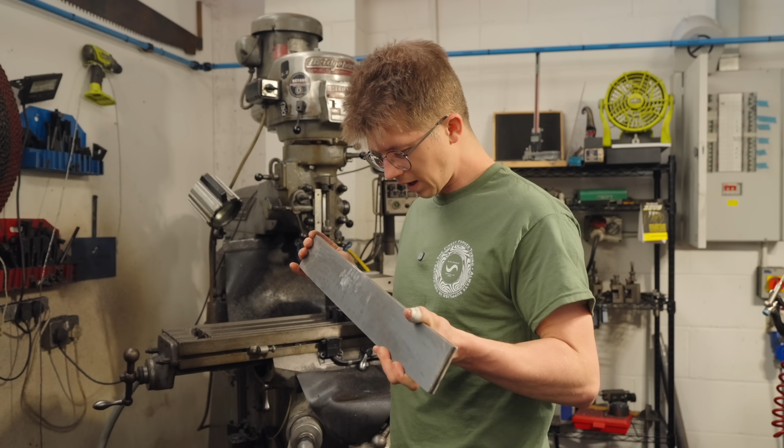Out she comes. Temper. Time has passed. Wow, how pretty is that? And it appears like it's all stayed bonded. I'm wrong. We actually have a delamination here. That looks like it's separated there. Oh no, it's definitely separated at the end. Looks good, good. Looks good, just at that one end. It's bloomin' delaminating!

Now I'm gonna bring this thickness down. I heard a hell of a noise on this cut. It is not sounding. Oh, that's awful.

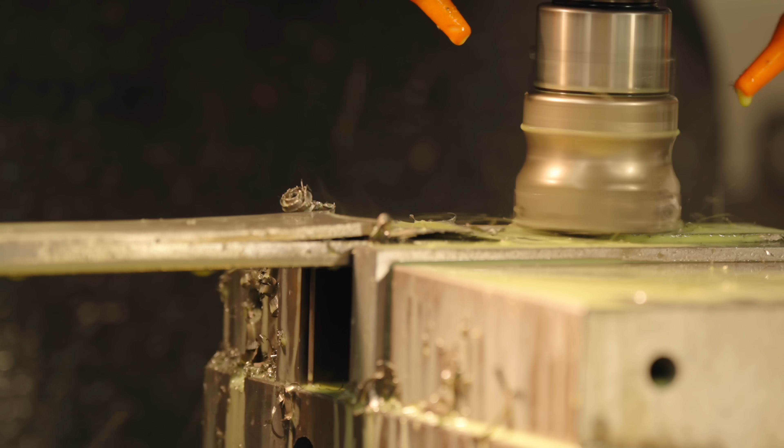Oh, no. It couldn't even handle the forces of a milling cut. That is very upsetting. What I was trying to do here was thin down the titanium. The concept being, bond it nice and thick so that we've got some extra stability, and then mill down the titanium to get the final thickness that we would want for a katana, which is about 6 millimeters. That would leave titanium cladding visible, and then as we ground our bevel in, it would then expose the steel core. So in trying to get down to that thickness, we have completely ripped the titanium off of the nickel.

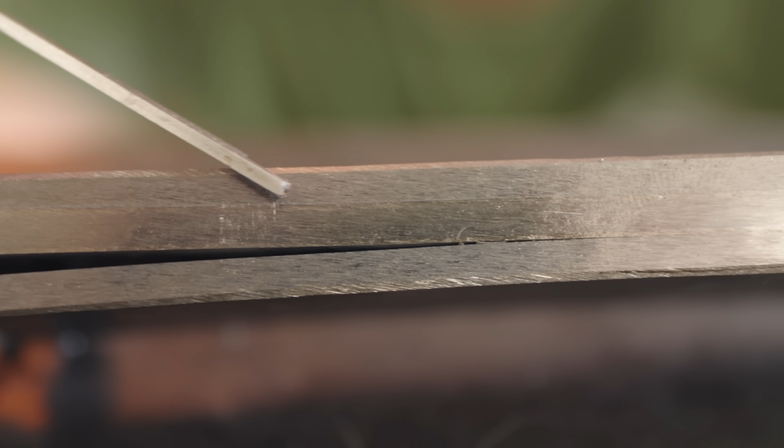And just the cutting forces alone were enough to delaminate the titanium from the nickel here. That is a real tragedy. That split goes all the way up to here. I don't think that'll do for a successful katana. Something tells me it needs to be a better bond than that. What has changed and what has gone wrong?

All that I can think to do now is, considering the really remarkable success we had rolling this piece's thickness down, is instead of trying to mill my thickness down on this, maybe we will try and roll the thickness down. It's possible that that rolling is enhancing the bond and making the bond stronger. Again, I can only do so much of it because we only got so much furnace length to play with. But I think this is my last hope now. Roll at 850 to reduce the thickness, get it close to katana thickness, then put a bevel on it and hopefully test its performance and see, is it going to be enough?

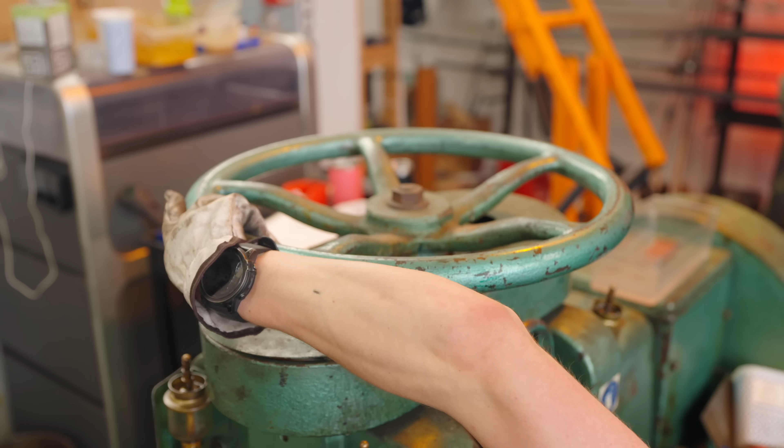Woo! Don't break. Only get about one more heat out of it before it's too long. Hard to make good videos when you're sad. Yeah, it's gonna be a real problem here. Because like, if you start saying, oh, I'm gonna make a titanium Damascus katana, and then you can't make the titanium Damascus katana, that's some real noob behavior there. Whoa, that got a bit bendy. Will it fit though? Oh gosh, don't know if that counts as fitting.

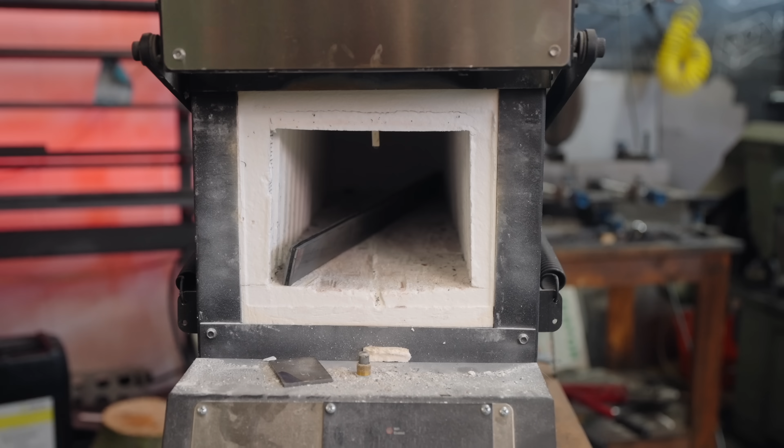That's quenched, now we temper, then we test. I'm not feeling good, guys! Not feeling very confident. Now we wait. And the bloody oil leak is back. Still incontinent. Will anything work? Can't even fix an oil leak.

Right, now this is only a katana-shaped object. Do remember, we are still very much in the experimentation stage. It's just that since I had a long, thin rectangle, I thought we might as well put a point on it. It gives us some positive reinforcement, reminding us that we're not just making rectangles of steel. Hopefully, eventually, we're going to make a blade.

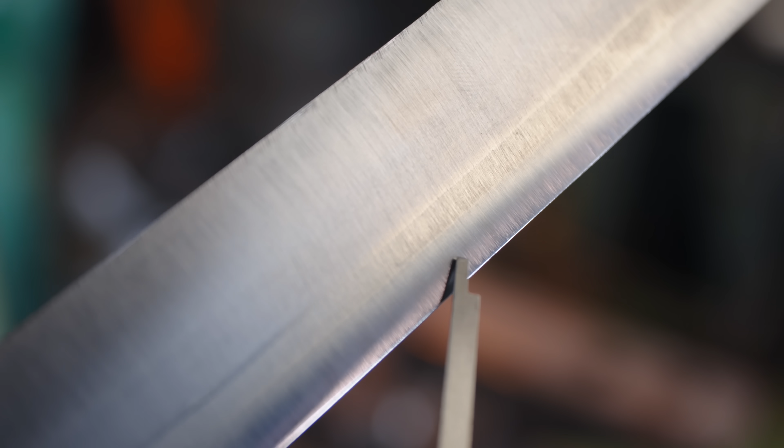Now, what have we noticed while we were grinding it? Here's our steel, here's our nickel interlayer, and there is our titanium. But have a look at this. Got a few little voids between the nickel and titanium there, here, and there on the other side, which would obviously be unacceptable for a final piece. This is just a test. It's only rough ground. We're going to find out if it'll break. Let's stress test it. That's satisfying.

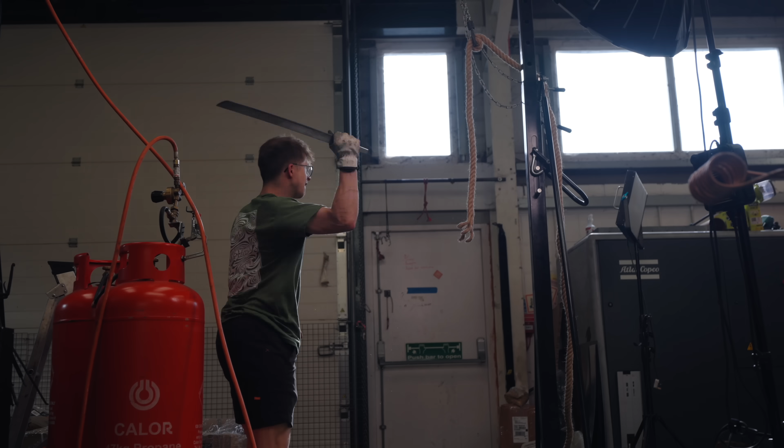Now remember, even if it survives all this testing, the final goal is to make one that has a Damascus steel core and a titanium Damascus jacket, not just the regular bits of sheet that we've currently made this test piece from. It's hopefully a good example to figure out our processes, but the final piece is going to be a lot more complex. Here we go. Oh, baby. Oh, you hear that noise? Oh! That feels amazing to use.

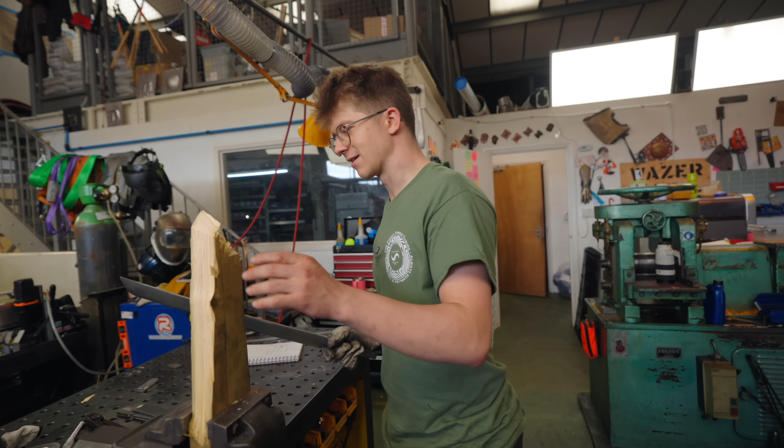Yeah! It's all still together. No way. I was definitely expecting this thing to pop into pieces, especially with those flaws there. Okay, we keep going. Oh! Oh, baby! That's a big bit of pine. Oh no! It's bending! Hey, a bend is a lot better than a break, let me tell you what.

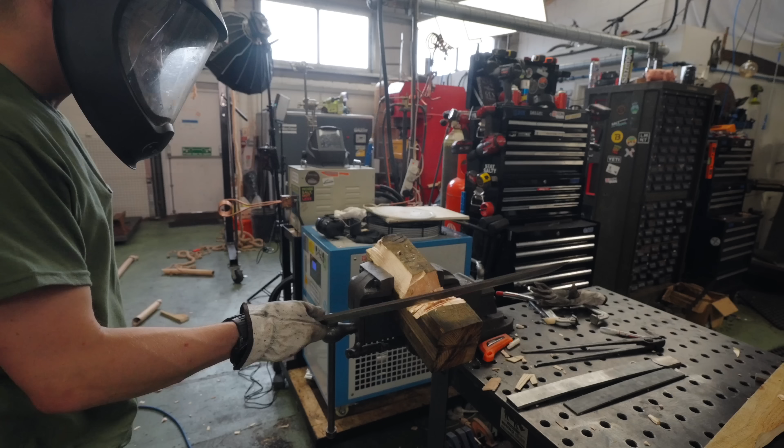Yes! Well, if it did all that, I'm pretty daunted to say, but I think as far as a proof of concept goes, it is possible to get the titanium stuck well enough to withstand some pretty significant abuse as a sword. The trouble is, our test piece in plain titanium and steel was this long, and we need to make one in titanium Damascus and steel Damascus that is much longer. This is going to be a challenge.

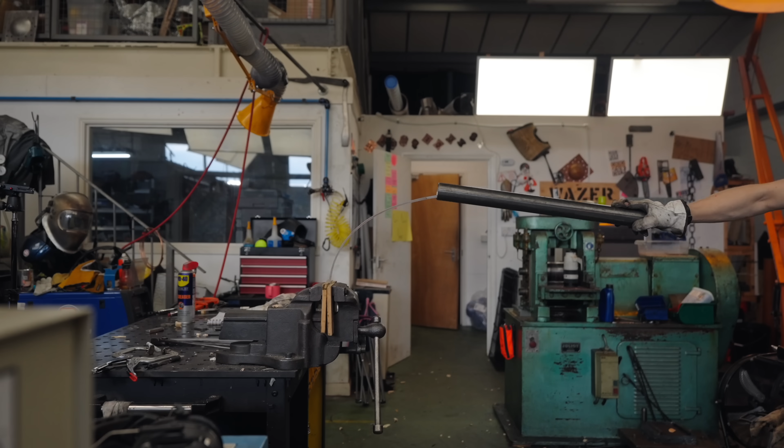Let's now see what happens if we bend it. Will it just split in half, or will it take a bend? In 3, 2, 1. That's awesome! No way! Yes! That's amazing! Now, obviously, we expect it to yield and permanently deform into that bend. It didn't break! I'm gonna need to build or somehow acquire a much larger kiln. I'm absolutely terrified, but I am quite happy holding this lovely example here.